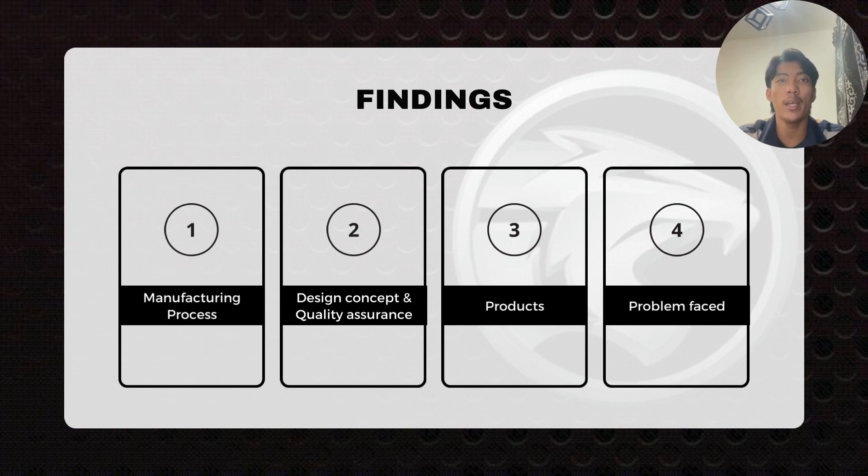So this is our findings in the site visit assignment, which is: first, manufacturing process; second, design concept and quality assurance; third, products; and fourth, problems faced by the manufacturing company.

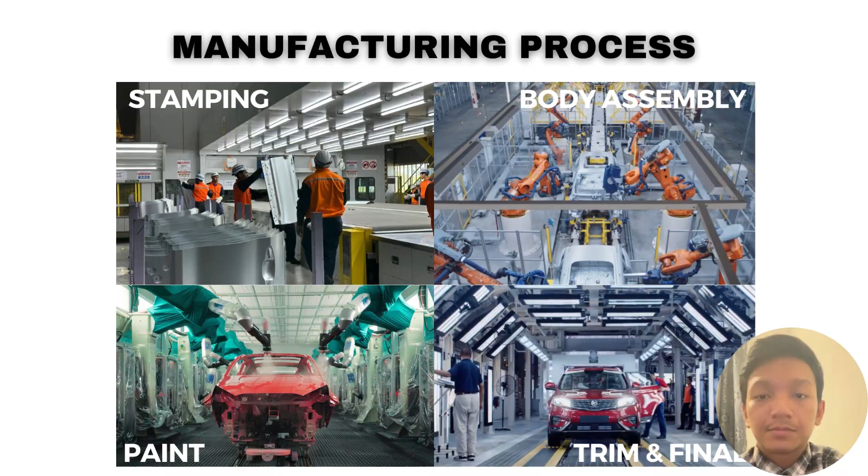Hi, my name is Muhammad Aliff bin Azmi and my matrix ID is 2022800096. Here I will be explaining the manufacturing process. In Proton Tanjung Malim, it consists of 4 types of processes in manufacturing, which are stamping, body assembly, paint, and trim and final. Let's move on to the first step, which is the stamping process flow.

This process consists of 6 parts: blanking, cleaning, die setting, cutting blank shear, piling, and stamping machine. For the blanking, the first step is they get the coil product from other countries such as Thailand, Vietnam, China, etc. After the coil is obtained, they need to uncoil it first and clean the coil.

Then the die setting needs to be prepared. After that, they need to cut the blank, since the coil product they obtain is in a large scale, so they need to cut it to a certain measured scale to put in the piling and stamping machine. After that, the die preparation needs to be made.

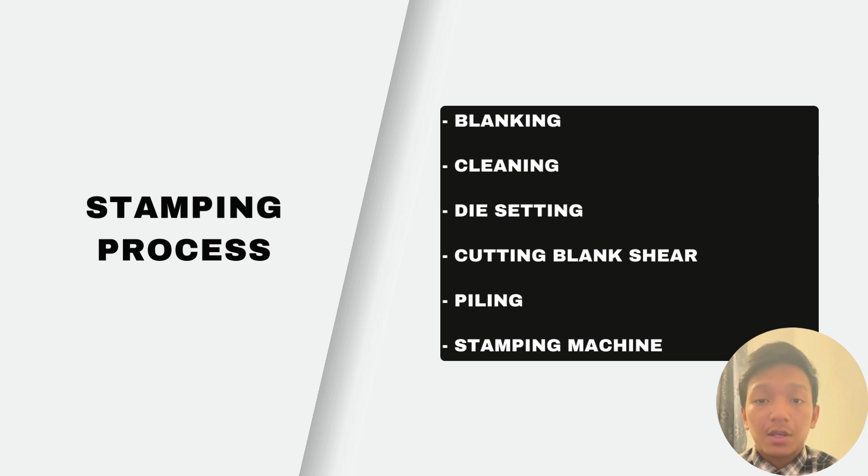After settling the die preparation, they will do 4 processes, which are the draw process, trim process, pierce process, and flange process. After these 4 processes are done, the restrike and cam process will be made. After the piling, rework needs to be made if something goes wrong with the stamped product. The machine used in the stamping process is a stamping press machine.

Let's move on to the second process flow, which is body assembly. This consists of several steps until it reaches body fitting, which are: under body, front end assembly, front floor assembly, rear floor, main body framing, roof installation, main body respot, spot welding, side structure assembly, closure part assembly, and lastly body fitting.

For the under body, front end, front floor, and rear floor, the under body operator will be in charge of doing this assembly, which includes installing the hood, installing the bonnet, installing the door, etc. While doing these 3 parts — front end, front floor, and rear floor — the sub-assembly will also be done by the operator using a welding gun.

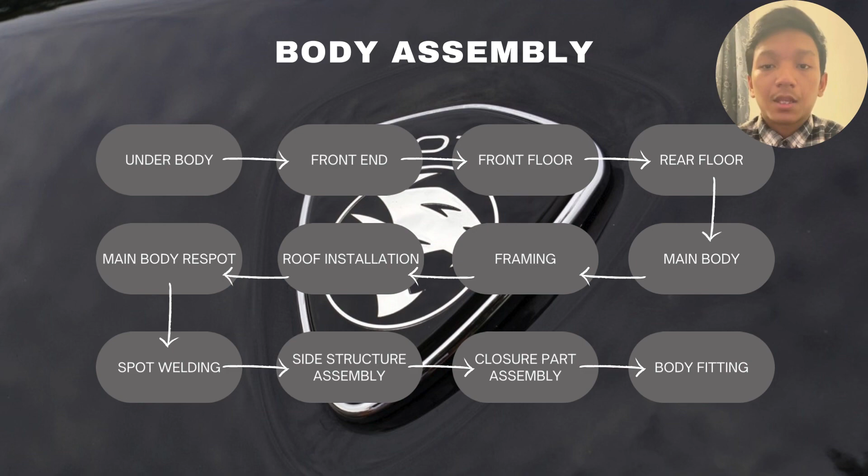Then we move on to the underbody. The underbody will be made by an automatic machine, such as main assembly, main body, roof installation, and it will also consist of a side. The closure part assembly will be done by the operator because it's not done using an automatic machine, since it is a limited area — the car has small areas, which limits the automatic machine from entering. So the operator will be doing this task.

Also, the electro deposition will make the chassis basis stay longer, and it will reduce rust, etc.

Next we move on to the primer. The primer paint is a substance applied to a surface before applying the color coat and clear coat. This is because the primer grips the chassis, making it easier for the color coat to attach on top of the primer. The primer is applied in up to 3 or 4 layers to make the grip as tight as possible for the chassis.

So we move on to the last part in the body painting, which is the color. In a color process, it will contain a color coat and a clear coat. As we all know, there are many types of color for a car. In Proton, they will serve about 7 to 8 colors, based on the type of car. So it will need to prepare a certain part for each color.

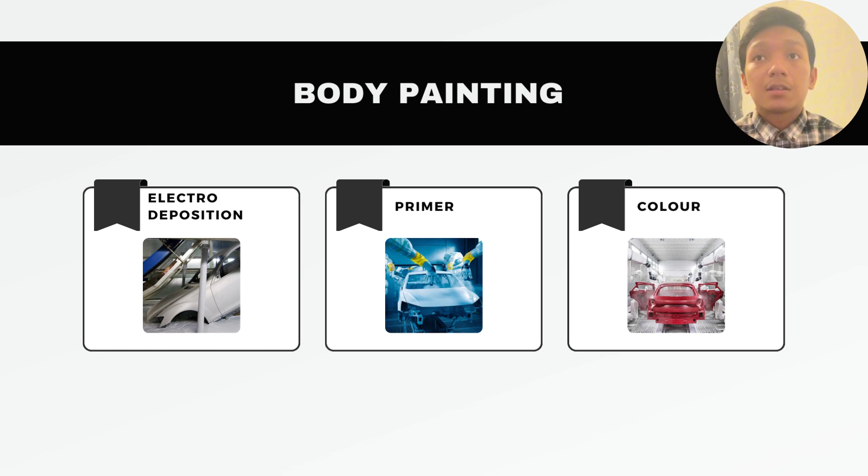When we were doing the site visit, we got to see the X50 applying a color coat. We experienced watching it face to face, and we were really excited to watch how they do the process. The color coat is done the same as the primer coat, up to 3 or 4 layers. Then we need to wait some time to let it dry. Then the clear coat will be applied.

For number 1, they will be doing the harness layout wiring, which is installing the main wire to control all the electronics in the car. Number 2, they will do the headlining and instrument panel, such as installing the door trim, installing the dashboard, the headlining, the rubber, and other things. For part 3, it's the fuel tank and engine docking.

They will assemble the fuel tank. For number 4, they will install the exhaust and the bumper. For number 5, they will install the mirror and do battery installation. For number 6, the door and seat installation.

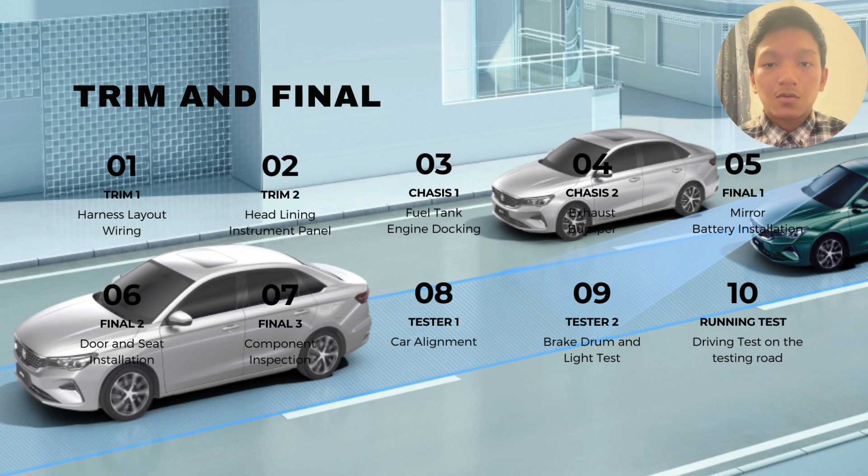As you may be informed, all these parts are done by the operator and they are led by the supervisor. For number 7 is component inspection. Number 8, it will go for car alignment. Number 9 is to test the brake drum and the lights, such as signal, reverse, high beam, and daylight. And lastly is a running test, where they try to drive it on a testing road, not the main road, but only for testing.

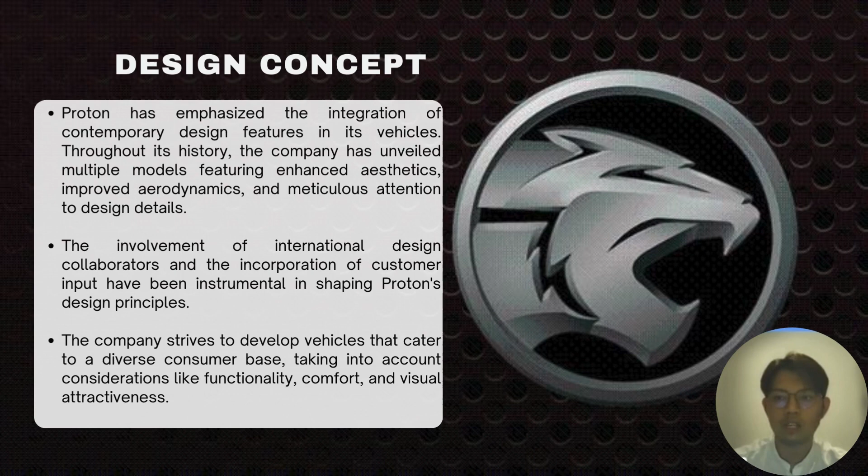For the design concept, for your information, Proton has emphasized the integration of contemporary design features in its vehicles. Throughout its history, the company has unveiled multiple models featuring enhanced aesthetics, improved aerodynamics, and meticulous attention to design details. The involvement of international design collaborators and incorporation of customer input has been instrumental in shaping Proton's design principles. The company strives to develop vehicles that cater to a diverse consumer base, taking into account considerations like functionality, comfort, and visual attractiveness.

Next we have quality assurance. Proton has adopted thorough quality assurance protocols to guarantee the resilience and dependability of its vehicles. A lot of testing procedures are employed across the entire manufacturing process, encompassing evaluation of materials, components, and the final assembly. Proton consistently integrates ongoing improvement initiatives and feedback loops into its quality management system to swiftly tackle issues and elevate the overall quality of its products.

A strong commitment to complying with international quality standards and obtaining certification is typically a priority for Proton, showcasing its dedication to delivering vehicles that exceed industry benchmarks.

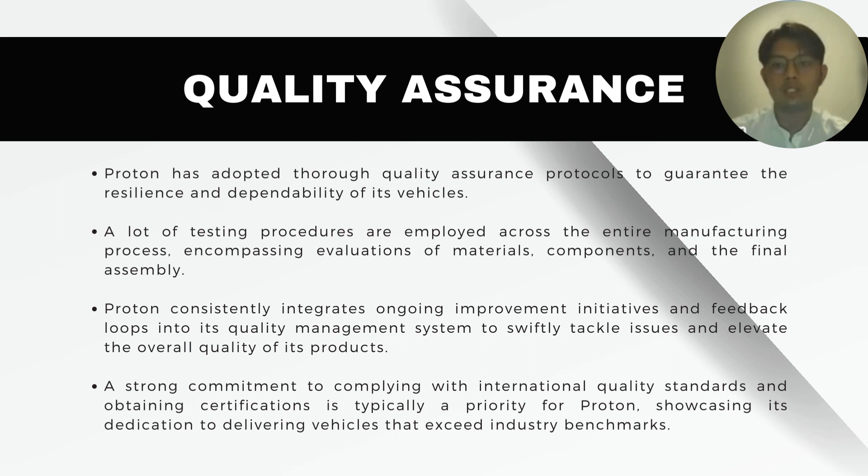And for the safety method, we have the Safety and Health Environment policy. Section 15 for employer and Section 24 for employee.

So, safety precautions at some sub-assembly stations: the workers need to use thick leather gloves when handling components with sharp edges, to prevent the worker from getting injured while working at the station.

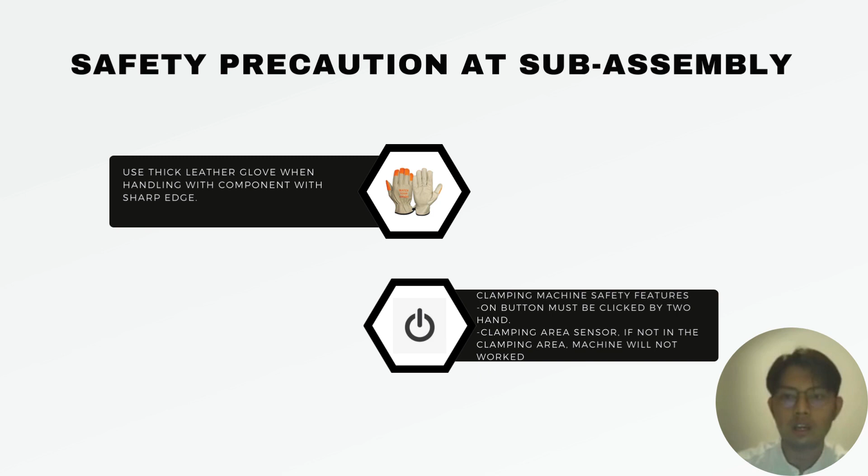So there are a few products by Proton that they have developed. For X70, X90, S70, and X50, these products are developed in Proton Tanjung Malim, while the Saga and Persona are developed in Proton Shah Alam.

Problems faced by Proton are technical and market issues. Technical issues include supply chain disruption, whether it's accidents or short supply, and technological advancement of components. Market issues include market competition, economic factors, and consumer preferences. Market competition includes competing with similar companies such as Perodua, Nissan, Toyota, Isuzu, and many others.

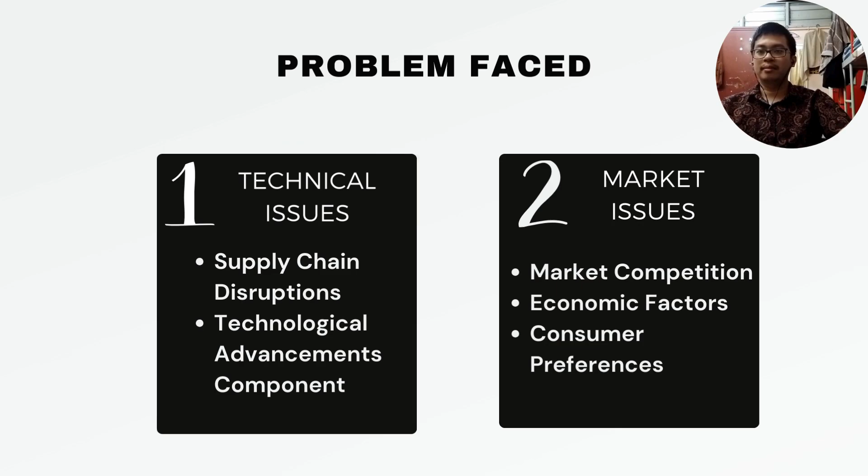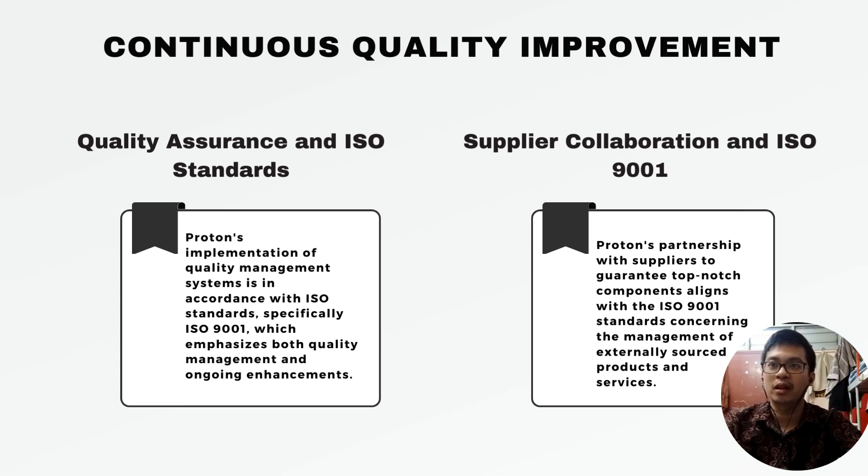Overall, Proton is able to adapt to modern technology and keep competing in the market and produce good products. They follow OSHA regulations, ensuring the safety of workers and providing a less hazardous work environment. Proton is able to deliver good products due to the implementation of a quality management system, abiding by ISO 9001 standard. Proton is able to collaborate with suppliers that provide top quality components, also aligned with ISO 9001 standard.